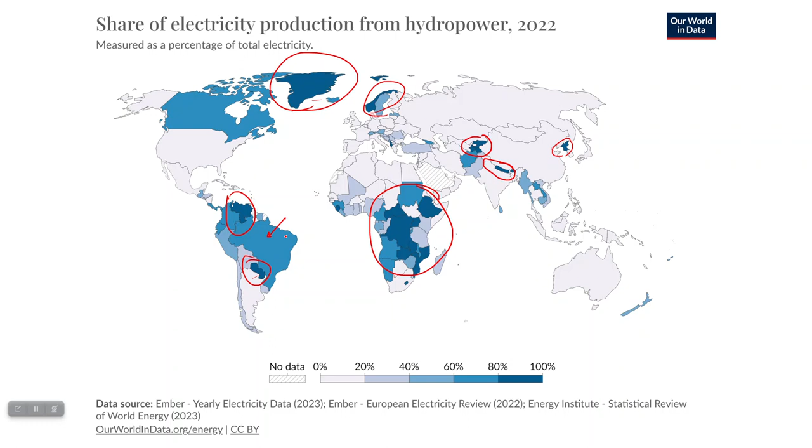A number of countries in the southern half of Africa. I think this is Nepal. I forgot which country this is, but you can see there is a significant chunk of countries in the world that are using hydropower to produce large amounts of their power. Brazil is using hydropower to produce between 60 and 80%, Canada as well.

So let's talk about the most common method of using water to produce electricity, which is hydroelectric dams. So dams are built across rivers, and their job is to block the flow of water. To do that, they end up collecting water in reservoirs, and the water that's in those reservoirs has potential energy. Then you can allow that water to flow from the reservoir through the dam to go downriver, and then it has kinetic energy. So it's going from potential to kinetic energy. And then that kinetic energy spins a turbine, which turns a generator that produces electricity.

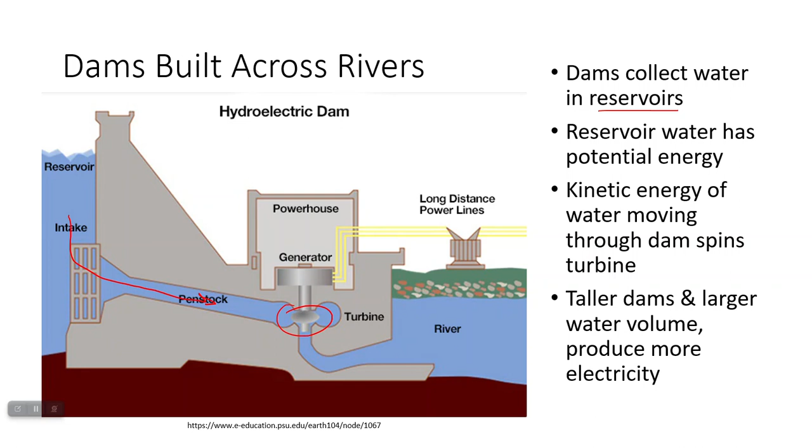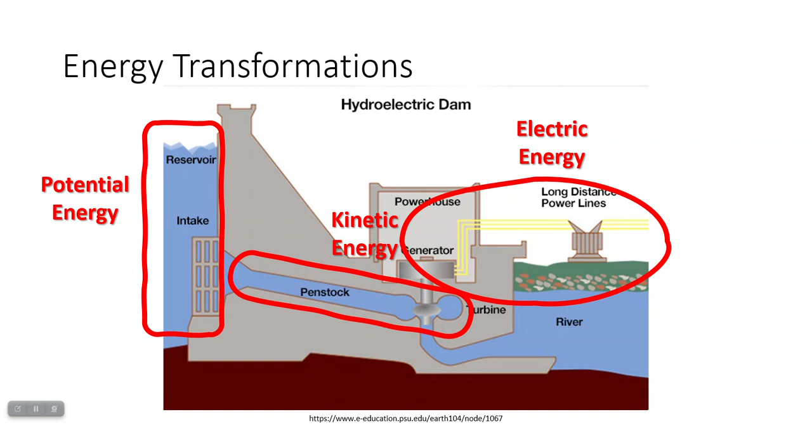If you want to produce more electricity from a hydroelectric dam, you're going to need to build a taller dam, or you're going to have to allow a larger volume of water to actually flow through the dam. So let's look at the energy transformations that are taking place here. You have potential energy built up in the reservoir water that transforms to kinetic energy as it's flowing through the gate, and also is kinetic energy when it's spinning a turbine, and then is converted to electric energy. So, very similar to what we've seen in a lot of our methods of electricity production, where you're turning a turbine, which powers a generator that produces electricity.

Here are four of the largest dams in the world. So the Three Gorges Dam is the largest. It produces the largest amount of electricity, so 22.5 gigawatts of electricity. It's also a very large dam just by the amount of water that it's holding back. And then you have the Itaipu Dam in Paraguay, or it's actually along the border between Paraguay and Brazil, and it produces 14 gigawatts of electricity. It was built in 1984.

I am totally going to mispronounce the Xiluodu Dam in China, which is going to be producing 13.9 gigawatts of electricity, and then the Belo Monte Dam in Brazil, which is located smack dab in the Amazon and is producing 11.2 gigawatts of electricity. So these dams are always major projects, which are going to cost a lot of money and are going to cause a lot of change in the local ecology of the river, which we'll talk about in a little bit.

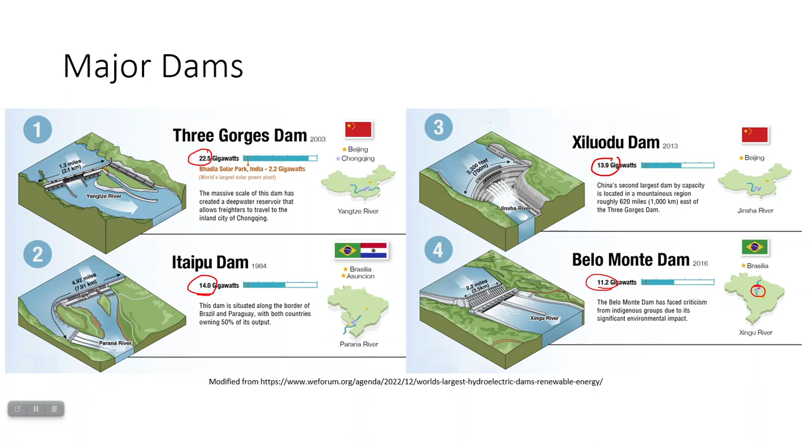In contrast, there are some places where they're starting to use micro hydropower, where they place turbines that are smaller in rivers that don't necessarily block the whole flow, which would allow animals to continue to migrate and water to continue to flow without building up a reservoir. And they are just a single turbine or a couple of turbines that are being turned by the water that's moving through.

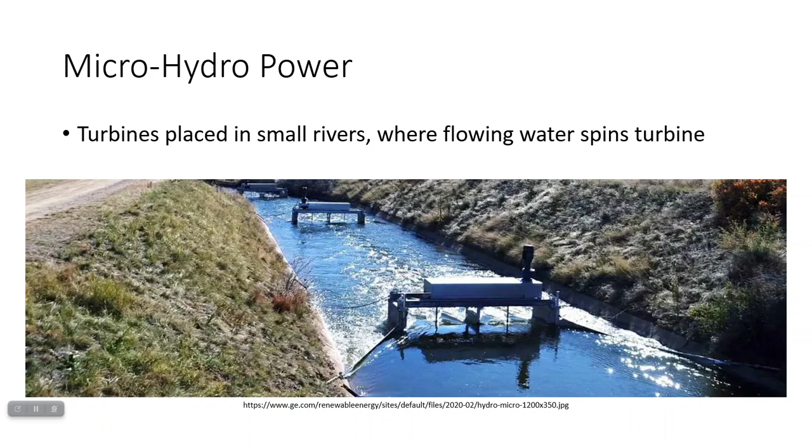Then there are other ways to produce water-based electricity that are probably less familiar to you just because they're not as widespread as dams. So you have tidal power, which is going to use energy from the high tide and low tide movement of water, and it's powered by that natural rise and fall of the ocean tides and the currents going in and out of bays and inlets and things like that.

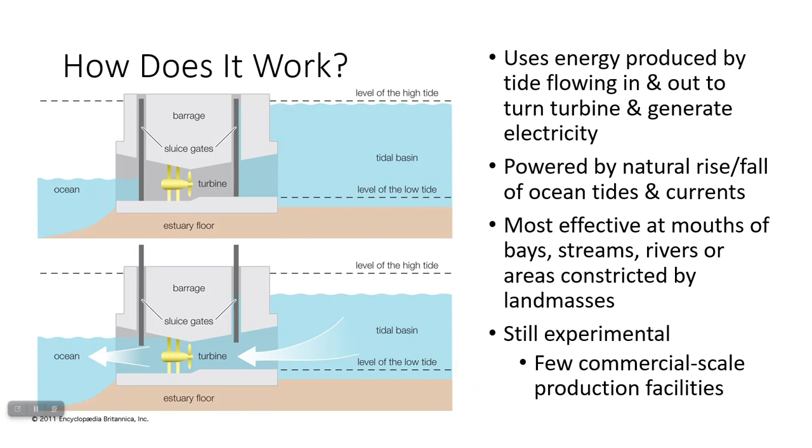It's most effective where you have kind of a constricted area so you can get water to flow faster, because the higher velocity of that water, the more electricity you're going to be able to produce. Unfortunately, it's still a more experimental technology than, say, hydroelectric dams, so there aren't a ton of commercial scale production facilities, although I believe I have at least a picture of one.

So there are a couple of ways that you can produce electricity using the tides. One is you have just these turbines that are sitting there in a bay or in an area, and as water goes inland with high tide, it spins the turbine, and as water goes outward with low tide, it spins the turbine again. These would allow movement of animals. You might have to make sure ships are careful around them, but it would have lower impact than a tidal

barrage, which is a large barrier that's blocking the flow of water, and water has to move past a turbine in order to move with high tide and low tide. Those are very disruptive to ecosystems because they will block the movement of organisms. They're also a little more expensive to build, but they can produce some nice, reliable power. So a lot of the systems that are already in place to produce commercial electricity are these tidal barrage areas.

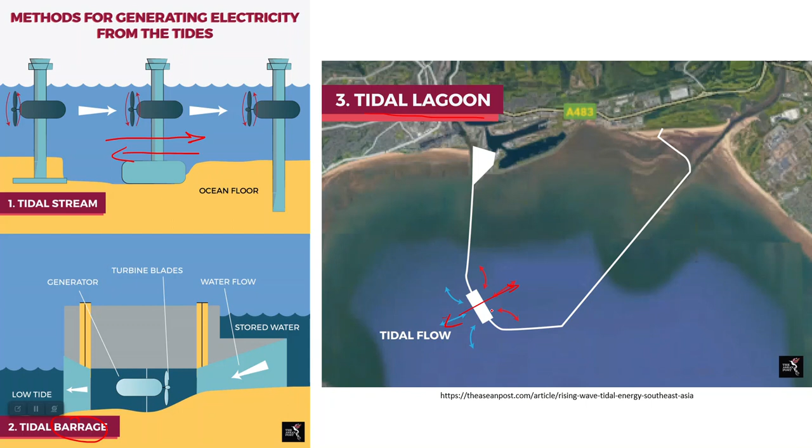And then you can create what's called a tidal lagoon, which is this third option. And you create this artificial lagoon and use the movement of water into and out of it during tides to produce electricity. Though I think there are only a few sites that use that.

Then there's wave power, which is even more experimental, but it has a lot of potential to produce electricity if we can just get it to work. It uses the regular movement of water when it's producing waves, so water going up and down. This is driven by the wind.

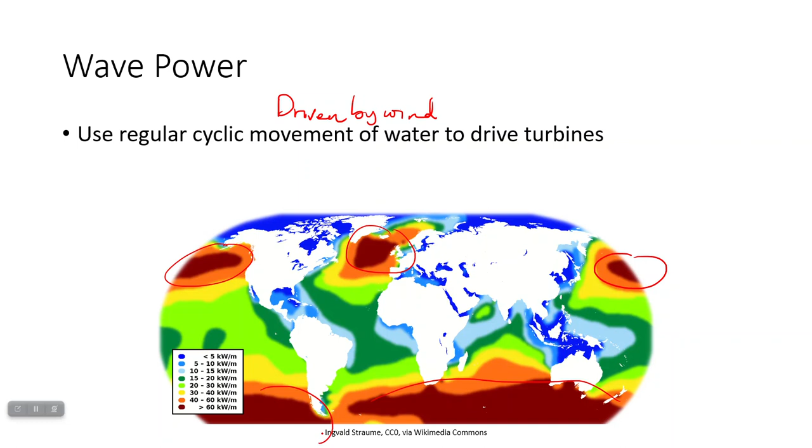And this map right here shows the potential energy that could be generated from the motion of waves. So you'll notice there's some areas where there's a high potential energy, for example, in the northern Pacific Ocean, the northern Atlantic Ocean, and then in the areas around the Antarctic Circle, basically. However, this is not likely to be a huge impact on world energy production anytime in the near future because there's a lot of technical difficulties in trying to get this to work.

So I'm not going to go over each of these. I'm just going to point out that there are multiple ways that you can try and produce power using waves. One that I had seen, but the company that was producing it has since shut down, uses the up and down motion of water as well as the side to side motion of water to drive some small turbines that can produce electricity. Here we have like a paddle being moved back and forth by waves that is connected to a hydraulic pump and a motor that can generate electricity.

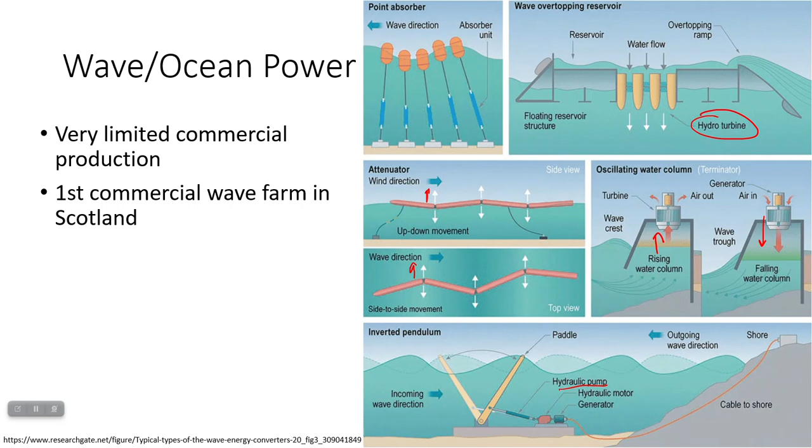Here you have basically when water moves up inside this column, and then when it moves down, that's going to spin a turbine, which is going to turn a generator. And then I am not very sure about this type. I would have to look that up more. However, there's not a lot of commercial production of this. The first commercial wave farm constructed was back in, I believe, around the early 2000s and around Scotland.

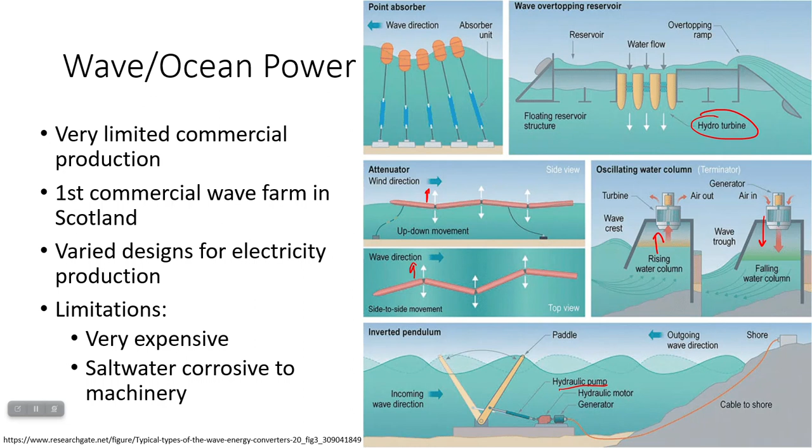There are a lot of different designs, but there are limitations in that it's expensive, and salt water is really corrosive to machinery. It breaks it down very easily. So you've got to find stuff that's resistant to salt water, and then you've got to get the power to shore. So, what are the environmental impacts of hydroelectric power? Well, one thing that's very good about it, it doesn't generate air pollution or waste, so it's not contributing as much to climate change. I'm going to bring up a point in a moment.

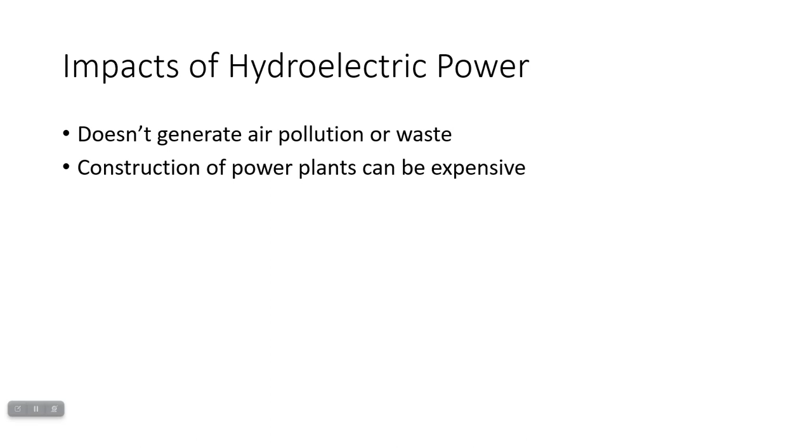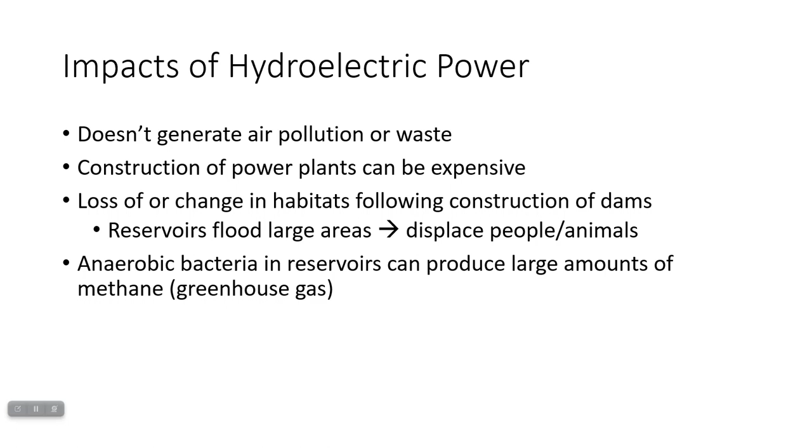The construction of these plants can be very expensive, so constructing dams, constructing tidal stations, etc. There's a lot of change to habitats following construction of dams because reservoirs flood large areas, which can displace people and animals. Another problem is when you build up these reservoirs, these large bodies of water, then you can get, especially if there's not a lot of movement in the water, these areas that are kind of more stagnant without a lot of oxygen. And so, without a lot of oxygen, anything that dies and kind of falls to the bottom gets broken down anaerobically.

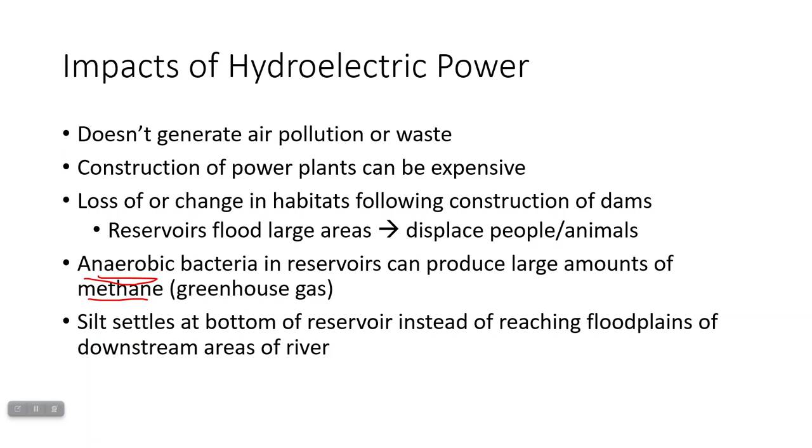And the problem with that is anaerobic bacteria, when they're working on breaking stuff down, produce methane. And this methane is a greenhouse gas that we'll talk about more in Unit 9. And it's a more powerful greenhouse gas than CO2. So hydroelectric dams can contribute to climate change. Another thing is in reservoirs, silt is going to settle at the bottom of the reservoir so it doesn't reach downstream to floodplains, which can be very damaging to ecosystems.

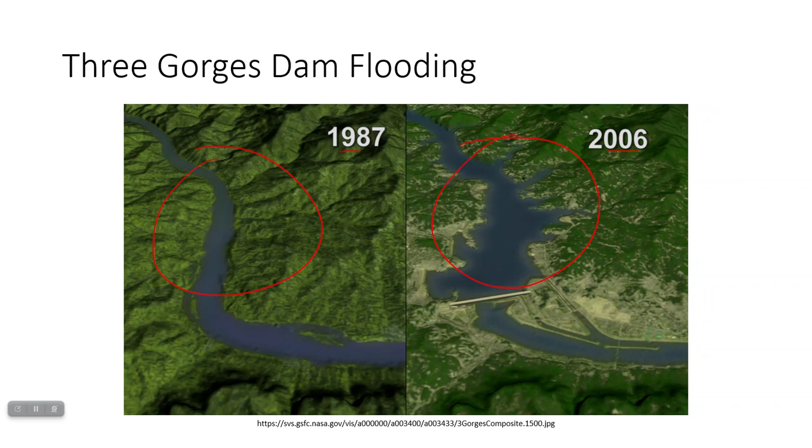So, an example of how things change when a dam is built. This is the Three Gorges Dam, an aerial view in 1987 and 2006. Notice the difference between this area and this area, how much space has been flooded. People were living in those areas. The plant communities and animal communities that were in that area were displaced as well. So, it causes a large disruption to the areas upstream of the dam where the reservoir is going to fill up.

So, in summary, what are some of the things that hydroelectric power can do? Well, with dams, once they're built, they have low operating and maintenance costs, and you can use them to control flooding downstream. So that way you don't have to release a ton of water. So downstream areas don't have to worry about, okay, it's flooding, we're going to have to evacuate. Doesn't produce polluting waste products, like doesn't produce sulfur compounds or nitrogen compounds.

They have a very long lifespan. They can be in existence as long as they're not damaged by earthquakes or anything else, and they're well built. They can exist for decades. And they get pretty high energy yields, moderate to high energy yields for the energy that's being released. They also create lakes. Those are the reservoirs that can be used for water, to provide drinking water, for example, to neighboring cities and also recreation.

For example, almost all of the lakes here in North Texas are created artificially by damming up mostly tributaries of the Trinity River. There's only one naturally occurring lake called Caddo Lake. So unless you live near Caddo Lake, any lakes you go to for fun or fishing or swimming or anything, those are all due to dams.

The cons, however, are the large flooded areas can displace people, damage habitats. There's also the problem of preventing fish migration, slow moving water. When water reaches a dam, it's stopped, so it's losing its velocity. And when you have slow moving water, you can have pathogens, disease causing organisms there. For example, stagnant water or non-moving water is where mosquitoes will breed a lot. So if you're trying to prevent disease spread by mosquitoes, you don't want to have ponds and large lakes build up.